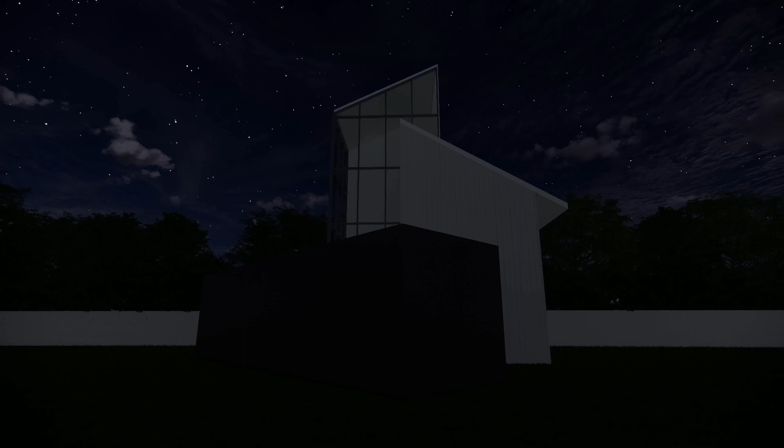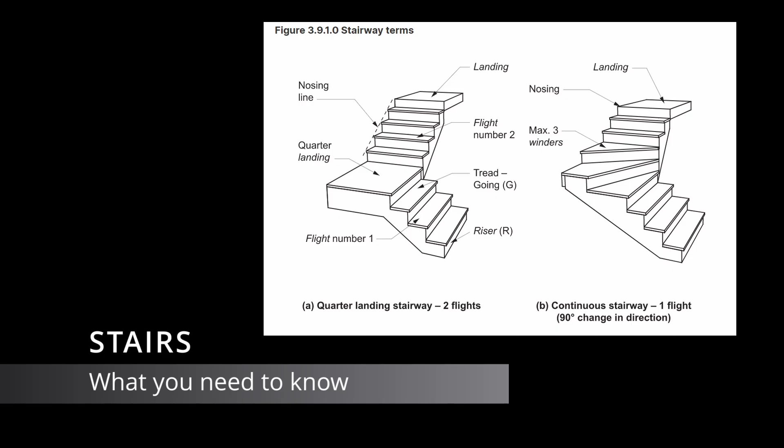Stairs are all too easy to draw wrong, and if you draw them wrong, it can be pretty bad. But I don't want to freak you out too much because they're easy enough to draw normally.

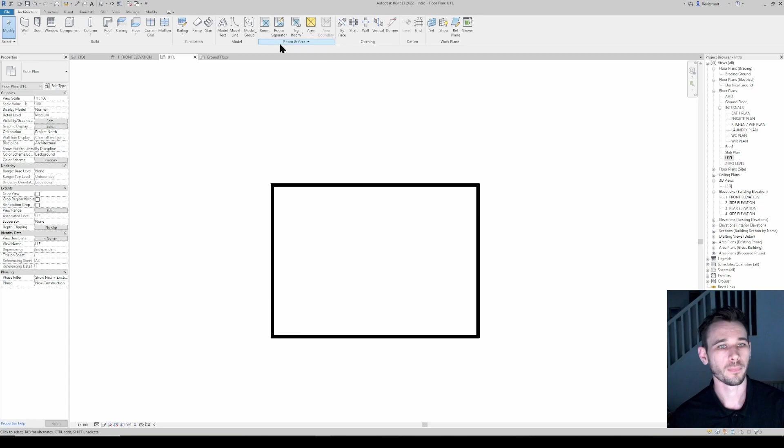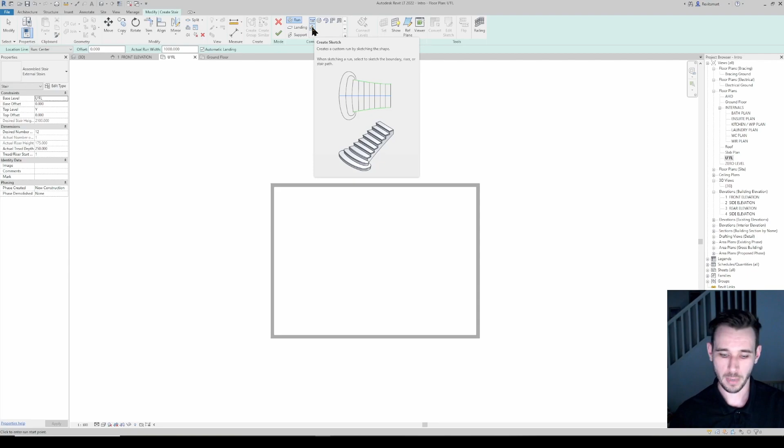There's two main ways to draw stairs. There's your standard run and landing - I'll call this the automatic method. The other way is kind of like custom stairs, which is creating a sketch and manually drawing the boundaries, the rises and the run.

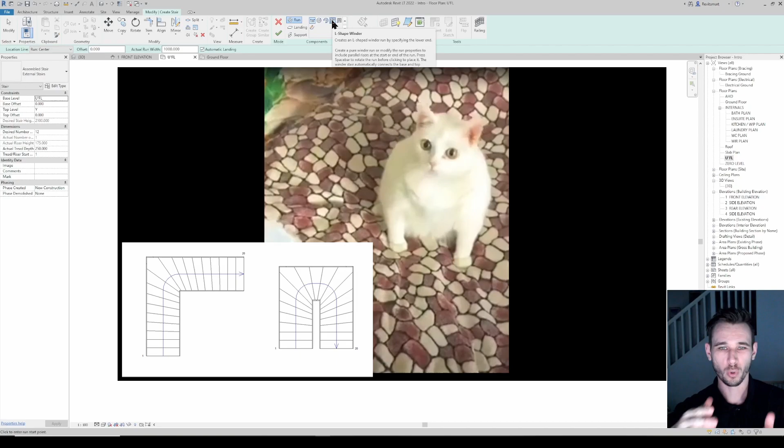There's a couple of tools like an L-shaped winder. They don't really work with the Australian construction standards a lot of the time, because it will throw like a corner of a tread into something that's not the corner, and they tend to look really gross.

So I generally will just do a straight run of stairs using the automatic method, or I'll draw them in custom.

The first thing you want to do when you draw any kind of stairs is set the base level and the top level. That's super, super important.

It really should just be as simple as, say, if we're drawing a set of stairs between ground floor and upper floor in a job - the base level will be GFL and the top level will be UFL for upper floor.

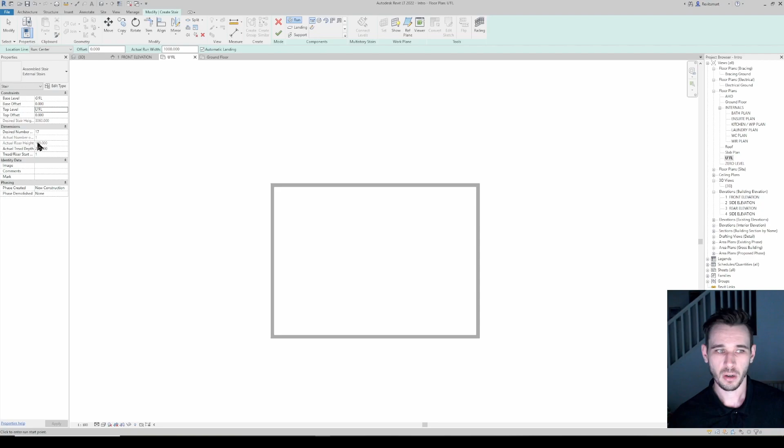That's going to give us 17 rises, with a riser height of 180 and depth of 250, which is perfect. Then that should just be a case of clicking and clicking, and then it's done. That is about as easy as it gets.

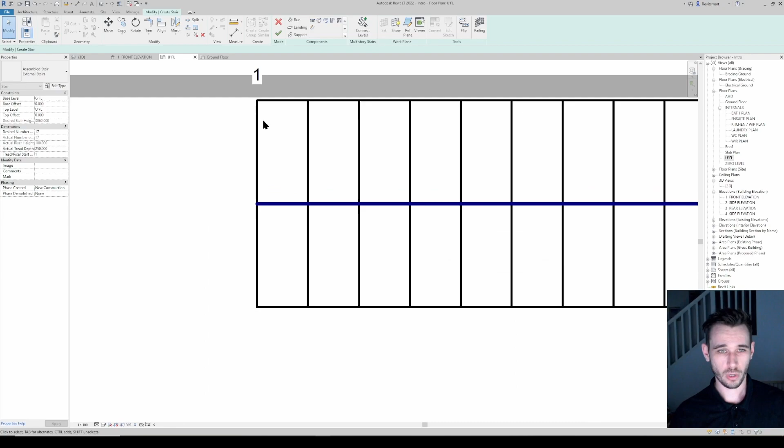There's a few little things you need to know about stairs, especially in Australia, but I'm sure everywhere else in the world has their standards when it comes to stairs.

In Australia, there's a rule called 2R plus G. I'll put an image of that up on the screen at some point.

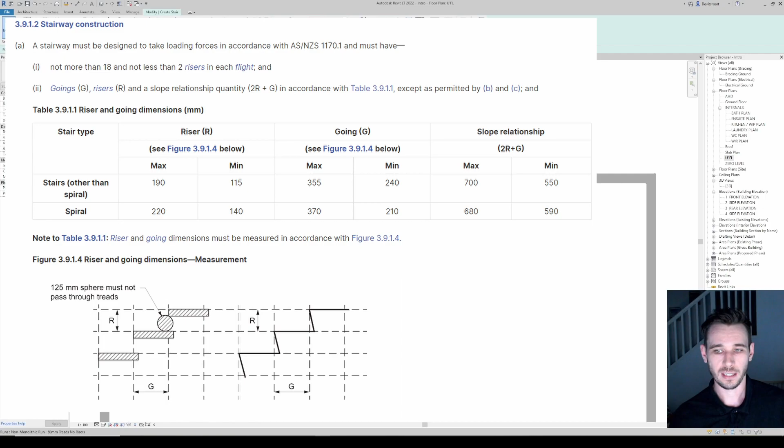Another thing to know is that you can't have 18 treads or rises in a row without a landing. So if this was any higher, we'd need to have a landing in the middle. The minimum depth of a landing is 750 mil.

Circling back to that 2R plus G rule, I try and simplify it by making all of my treads 250 mil deep, and all of my rises as close to 180 as I can get. So, if you're trying to work out the difference between...

a 3060 difference between upper floor level and ground floor level, divide 3060 by 180, and whatever number that's close to will be the desired number of treads and rises that you need. But that's for the easy method.

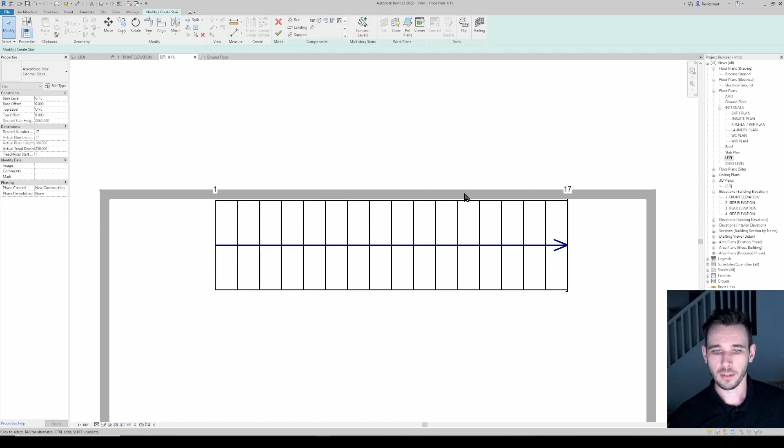So if we were to have a look in this - and that's a hectic railing, disregard that.

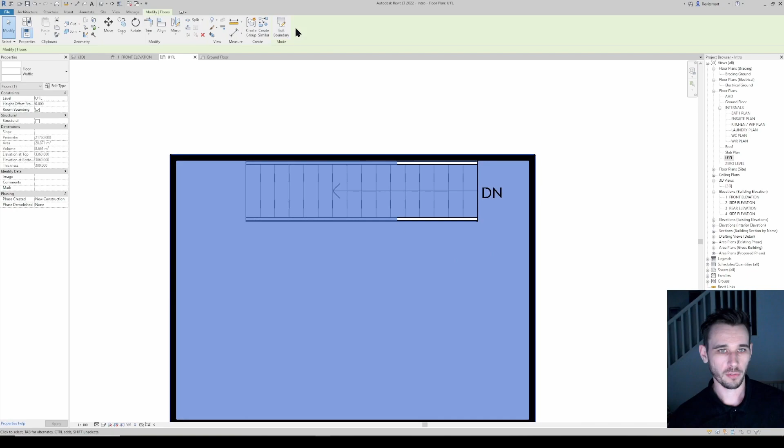So I've drawn this in on the upper floor plan. When you're actually cutting a hole in the floor for the stairs, I like to go through and just cut a hole. Some people use a vertical opening or a void or something, but I just cut a hole. Is it the best way? Maybe not.

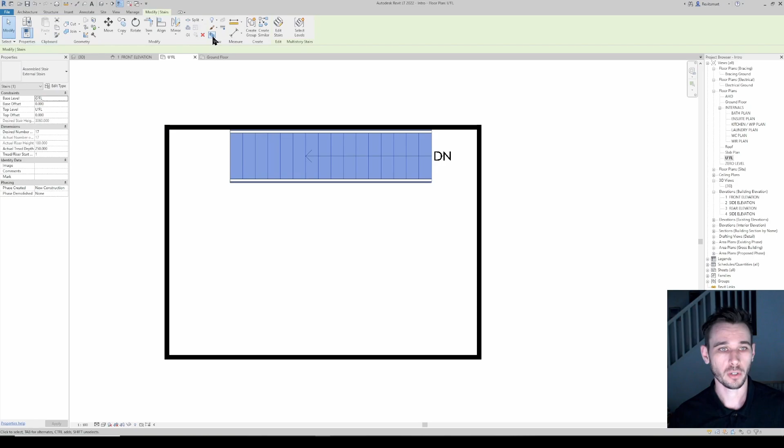Something else that's a very, very good habit to get into when drawing stairs is, from your plan or wherever you've drawn them, go section box, and that is going to show you if you're actually making the height or not.

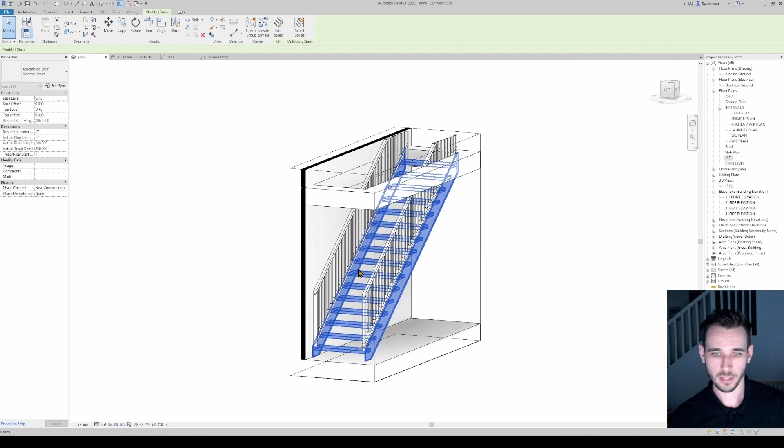Because sometimes a little dialog box will pop up and it'll say, oh, you've exceeded such and such rises, or hasn't met the level or something. This is just a way of double checking and reassuring yourself that it actually does meet the height requirement that it needs to.

Let's get back into doing a custom stair. So same deal with a custom stair.

In this screen, the first thing you want to do is go base level, GFL, top level. We'll change that to UFL.

Very important, because if you don't do that and then you draw the stairs, you can edit them after you've drawn them, but I just delete it and start again. They don't take that long to draw, but they take a long time and they're very fiddly to edit. So if anything ever changes with my stairs, they're gone pretty quickly, and I'm just going to draw them again.

Okay, so we've got our levels set up. We're happy with all of that. Now we're going to click on this little squiggle button here, create sketch.

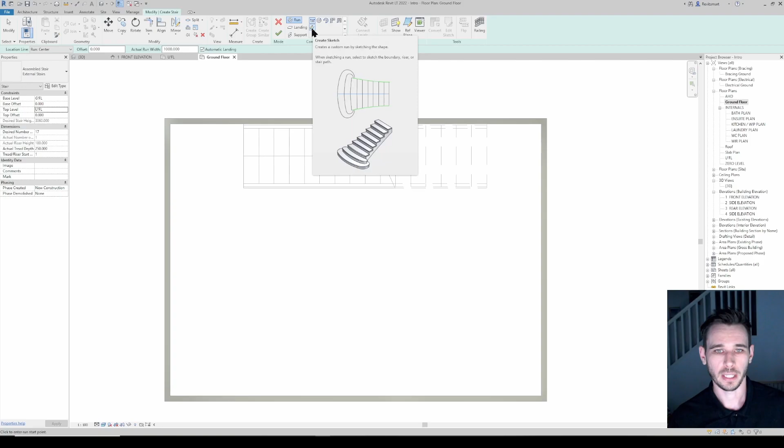Okay, these three boxes here, they're like the puzzle pieces for this to work. You need to define the boundary, you need to define the risers, and then you connect the bottom and top of the stairs with a stair path.

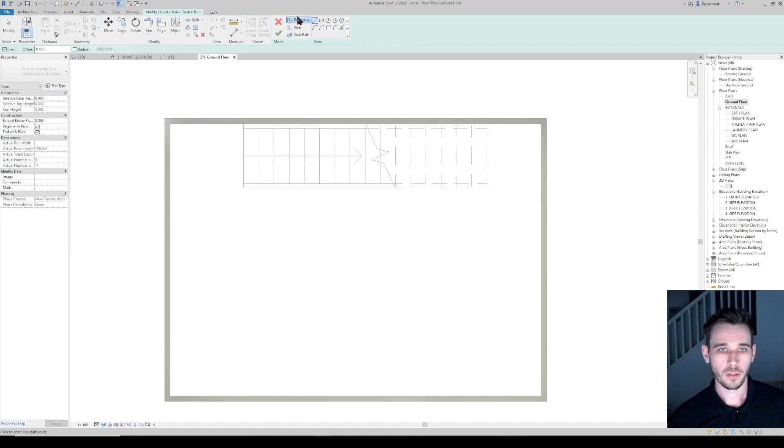So let's draw in a dog leg set of stairs here. So we're going to go boundary, like so. Stairs are generally 1,000 mil wide.

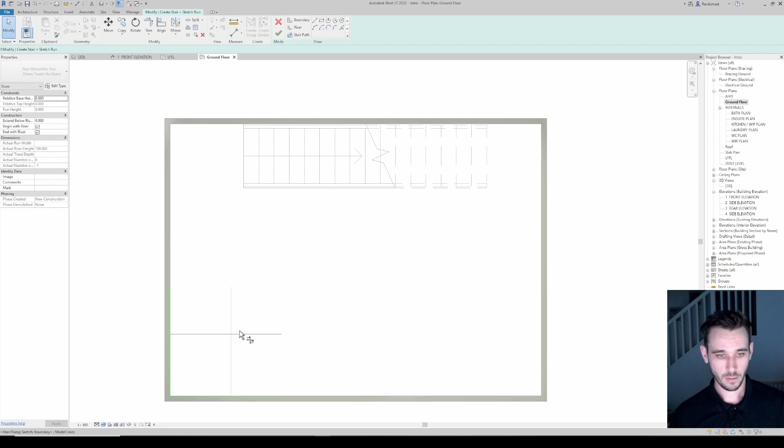And treads, as I just mentioned, will be 250. So let's kind of start here. Use the offset tool.

Okay, so say this is the bottom of the stairs. We've got a bit of a run up here, and then we'll use the mirror tool on the diagonal to... oh, I hate it when I do that. Mirror tool on the diagonal, but remember to press copy like a professional, and then we can continue our run.

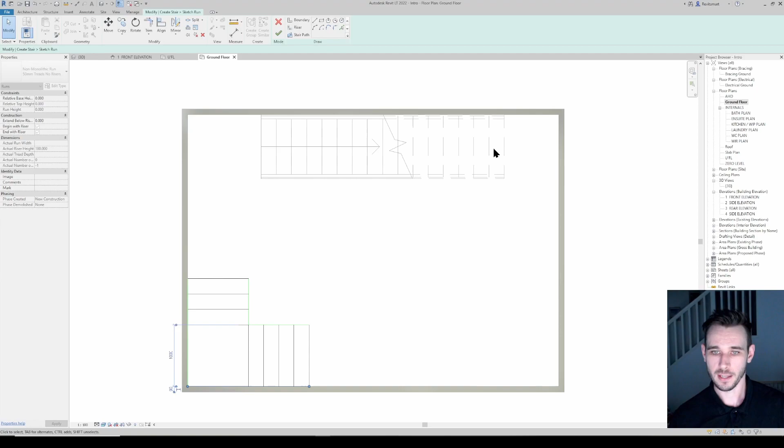So this is where, back to what I was saying a second ago, with the automatic stairs, it's automatically just going to put them in. But when we're drawing them in here, it can get a bit funny with trying to count them.

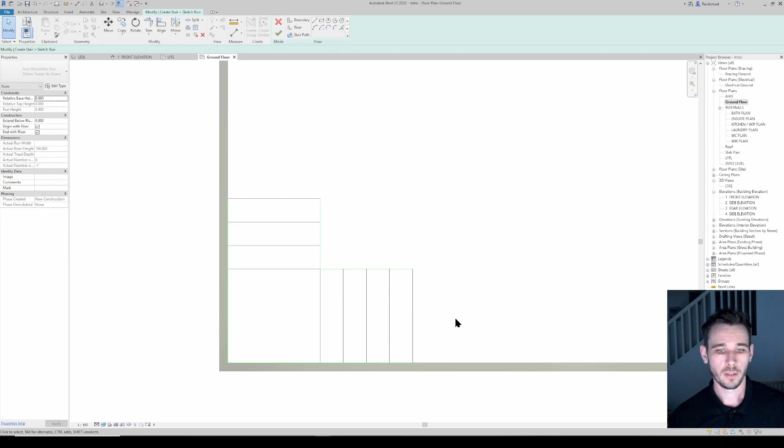So let's go. Cool, 17. So we've got 4 there, got 5 there. We've got a few more to go yet.

And it will double check this with you when you get to the stair path point.

Okay, so now we go stair path because that's what creates it. Just to explain this a bit better, the green lines are the boundary lines, and we can see there that we hadn't connected that. And the black lines are the treads. So you want to check that they're all 250, because stair construction does matter, in fact.

And then we'll go stair path. We'll start it at the bottom here. We'll go there, and draw it across at the 45 here.

Okay, so there's normally a little thingy that pops up saying that we've got 17 treads or however many risers, or we're missing some. So we've got 16 there. So we could...

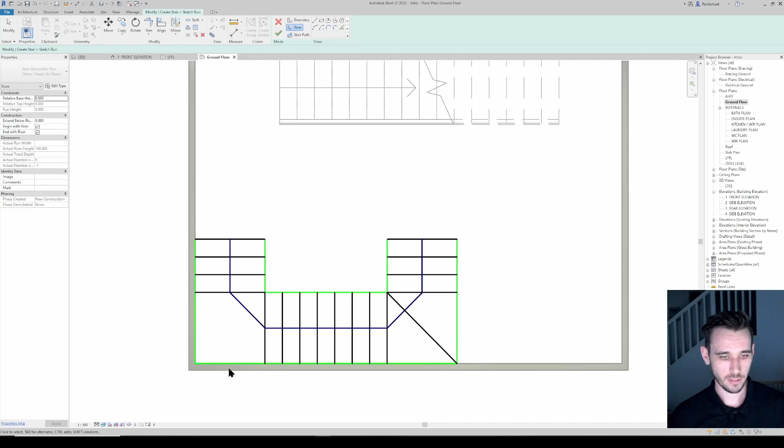A couple of options. You generally want stairs to be pretty symmetrical, so we don't want to go and put... there it is, it's like hidden behind the wall there. So let's keep zooming out. Yeah, see, it's like 15 risers created, 2 remaining. So good to know.

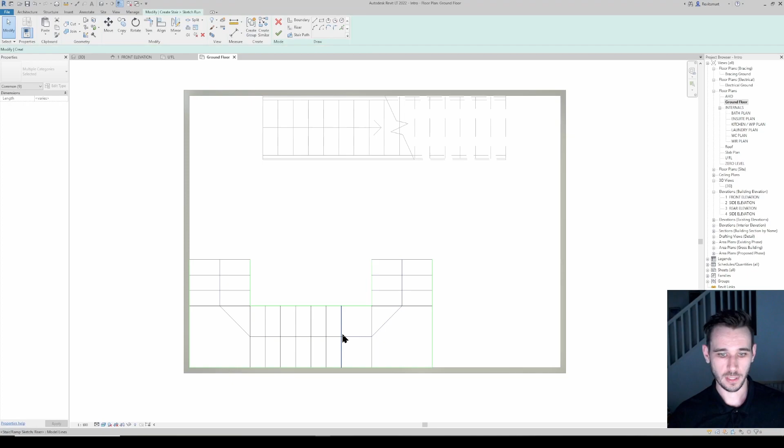You want your stairs to be symmetrical. You don't want them to have a riser in the corner of the landing there, but not one here. So if you have the freedom, it'll be much better to move this across 250 and then put another riser in there.

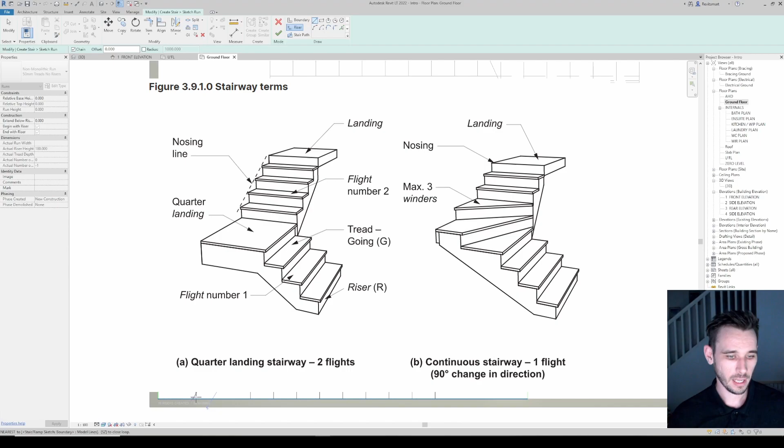I'll tell you as well, I won't actually draw them in, but I'll just demonstrate with putting winders on landings. So what would you call it, like an angled step on a landing is called a winder, because it's kind of winding the corner. The angle that you want to draw them in at, you want it to be...

Where's a good example? So I make it, see how it says 60 degrees there? So I'm gonna make it 60 degrees, and then I'm gonna do the same thing to the other corner. So that's gonna be 30 degrees.

So we've got 30 degrees, we've got 60 degrees, because obviously this is 0, this is 90. So 0, 30, 60, 90, that's good. Or if you're just putting the 1 in, that's going to be at 45, like that. You can't have more than 3 either, because that's just gross.

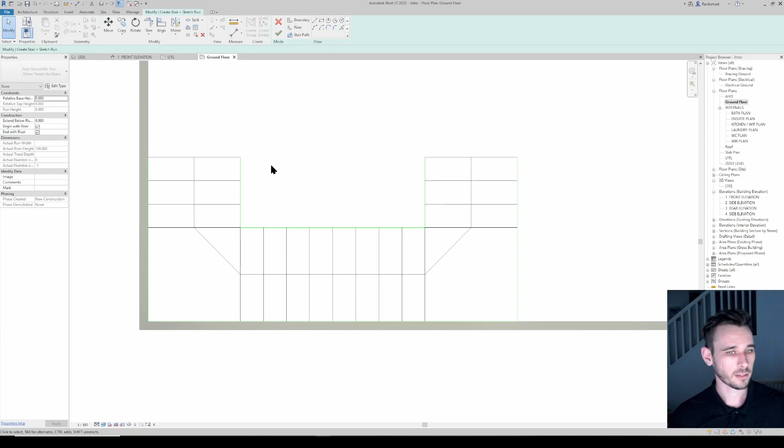Okay, so let's see how this is going. I think we might be one short, but there's only one way to find out. So let's go finish stairs. Actually, we might be okay. Of course, I've got that heinous railing applied still, because I'm an idiot. Okay, so that looks good to me.

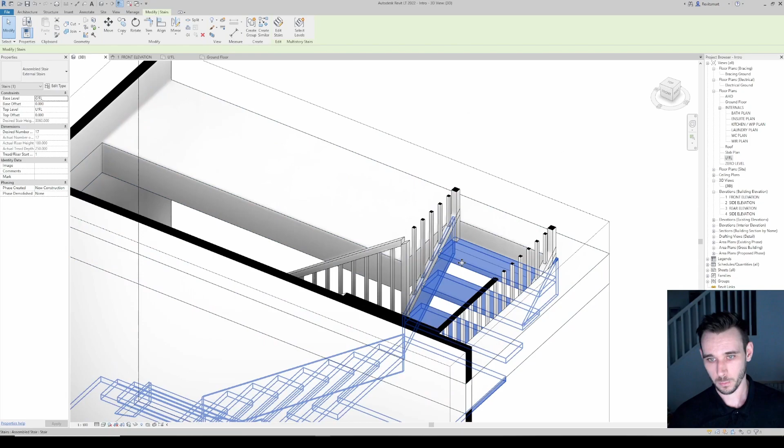We've got 1 tread going down there. That's looking all good here. I think that is a pretty good construction.

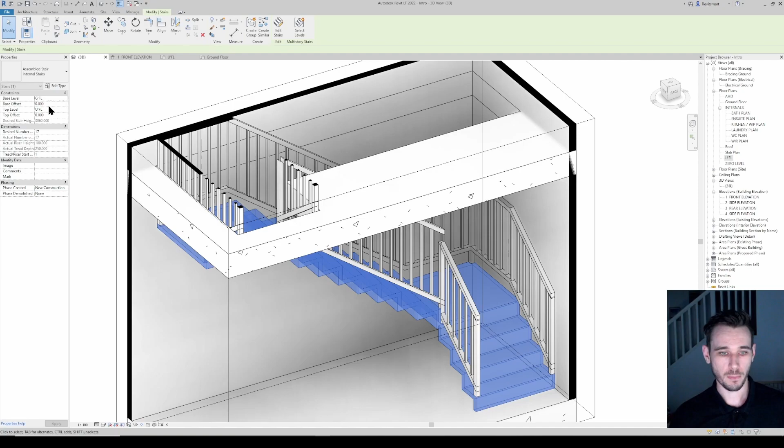You can change the type of stair depending on what you've got in your template at any time. This is just one that we've got in our office, but it might not look the same as what you're working with at your end. But the point is that the stairs have to meet the requirements set by whatever country you're in. There's going to be some rules around how many stairs you can have in a run, how high the rises can be. There's a bunch of stuff, but they're not too complicated. But you have to make sure that you follow the rules, because if you don't, you're going to get a builder ringing you about the fact that the stairs you drew don't actually connect the levels, and that's bad. That's really bad.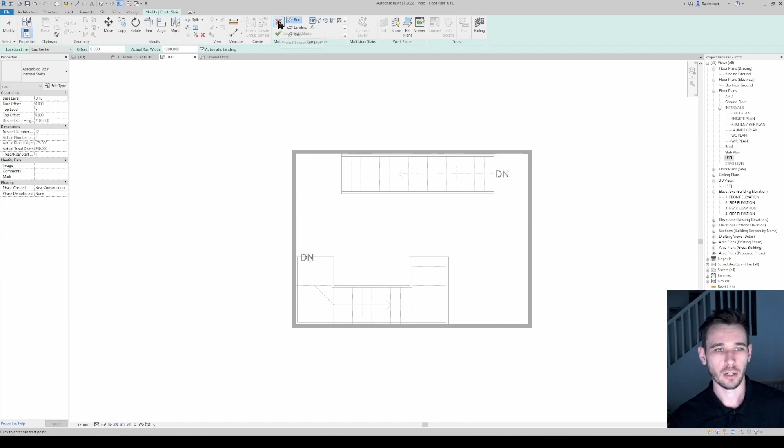That pretty much covers it. There's probably a couple more things. I could honestly talk about the rules around the stairs a lot longer, but they don't tend to matter too much. Oh, okay, yeah, one more thing.

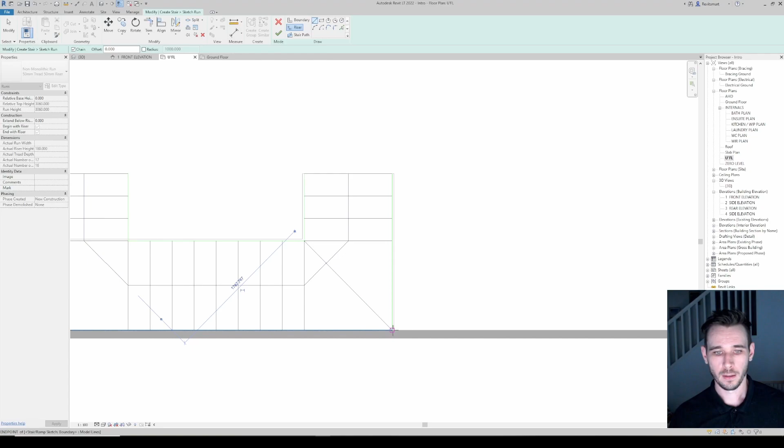We could have drawn this staircase using the automatic method quite easily. So it's when I have to put some winders in - that's when, say I had to put that in. Revit's really not good at that kind of stair configuration. It might be, I'm not sure how it works, and I've never had any luck with it. So if I'm putting winders in, I'll do a custom.

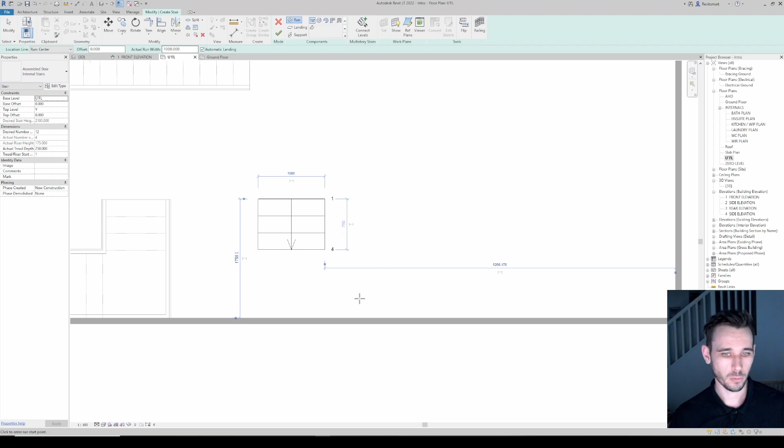But if we were to redraw this using the automatic method, you'd kind of go 3, and then you want to - we know these are 1,000 wide, so if we make the center line here 500, that's cool. Okay, so you see the problem with what I've done here is I'm just going from upper floor level to Y, but the point is when you do one run and then another, it's going to automatically generate a landing, which is really handy.

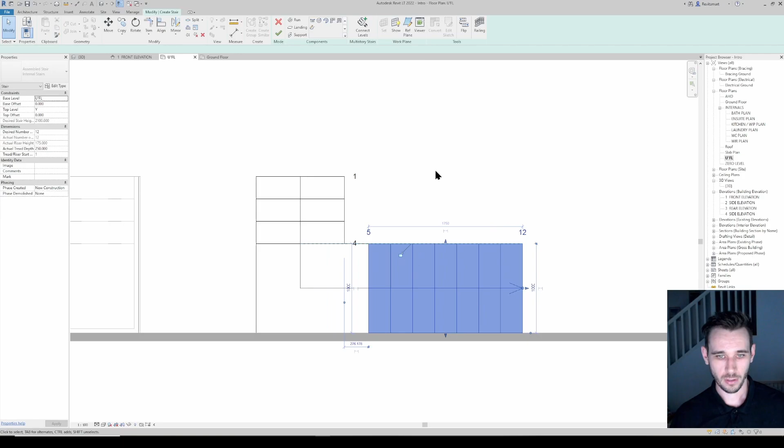When you're editing the stairs and first drawing them, you can move them around a fair bit. Revit's pretty good with that, but try and keep them as - it's kind of like a zero-sum game. You don't want there to be too much of like this nonsense going on with stairs. Just draw it in the corner, because nobody's got time for that madness.

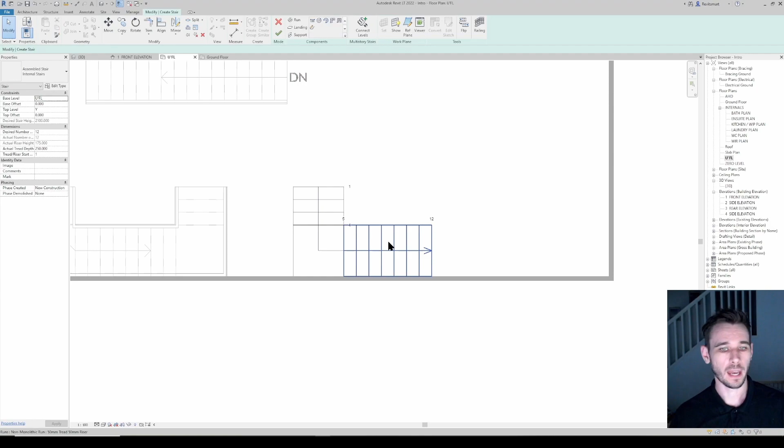If you're drawing runs, it automatically is going to put a landing in between them, which is good to know. But if you had to put some winders in there, and really like get as many stairs as possible between the levels, then that's where you really want to draw the custom stairs, as I call them. But yeah, that's the gist of it.